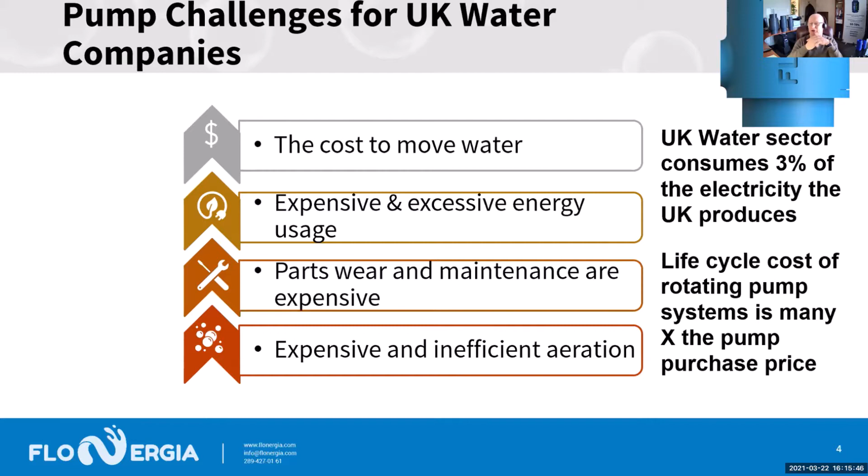The other problems are that pumps are expensive. They wear out. It's difficult to maintain them. And as we know, the life cycle costs of rotating pump systems are many times the purchase price of those pumps, so they're very expensive. The other issue is aeration generally is inefficient and expensive. It costs money, it costs energy to operate.

So how do we solve those problems with our technology? Well, it's quite simple. Our technology uses only the air required for aeration alone to both pump and aerate water. We don't need to do both. This reduced energy profile results in savings of 50 to 70% versus conventional aeration and centrifugal pumping systems combined.

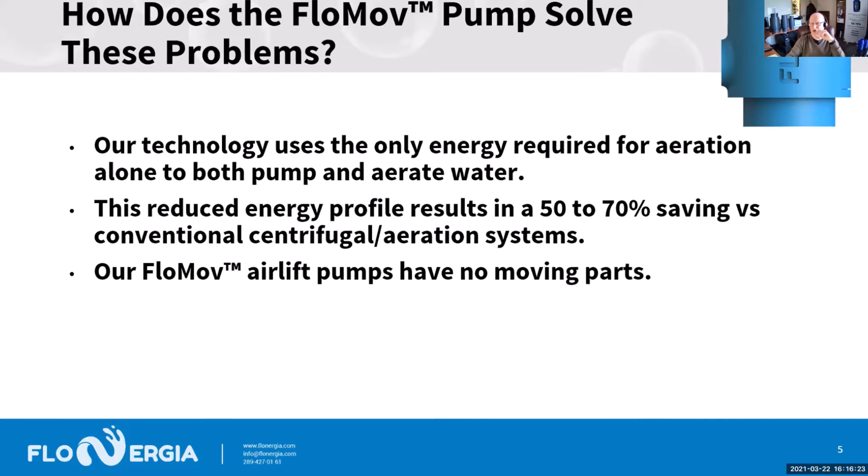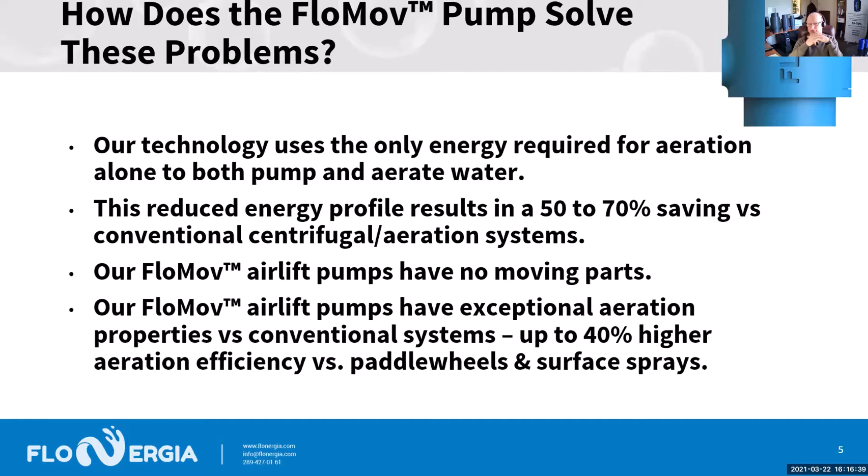Our FloMov pumps have no moving parts. There's nothing inside them. We just use air and the design of the pump itself to move water. Our airlift pump technology has exceptional aeration properties, up to 40% improved aeration efficiency versus paddle wheels and surface sprays. So you're probably wondering, how does our pump work? How does this 100-year-old technology actually function?

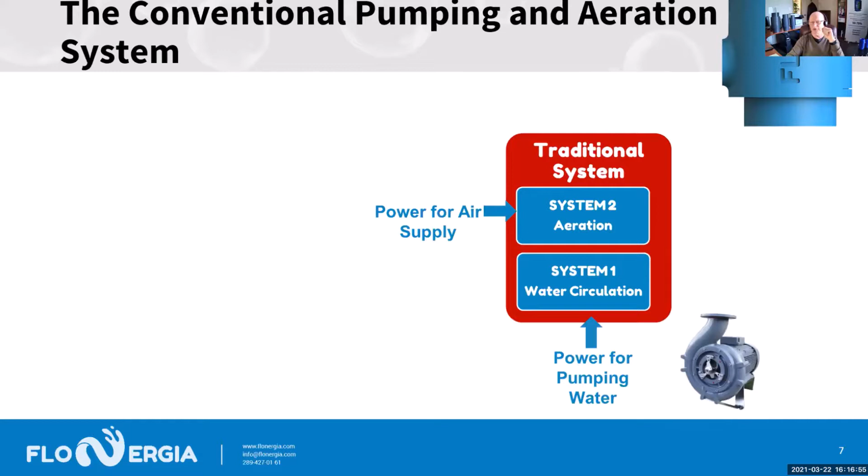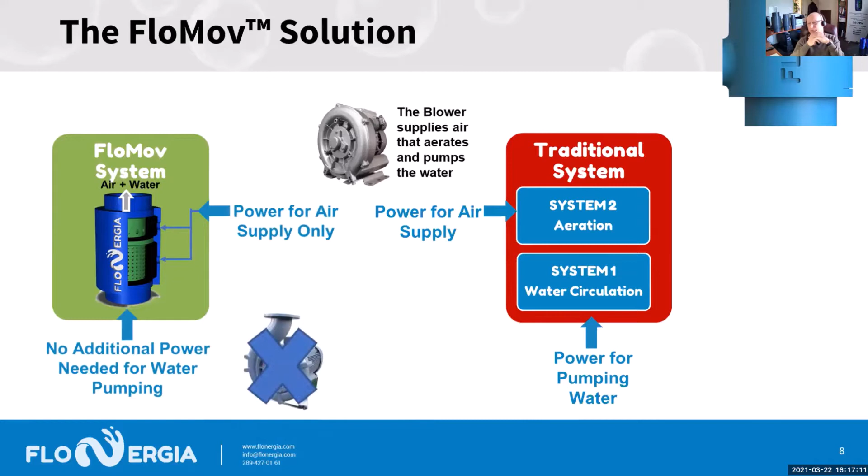Let's talk about a conventional traditional system. In a traditional system, you need power for pumping water and you need power for aeration. For FloNergia, we get all of the power to move and aerate the water from that single blower. We don't need additional pumping. We can move water and aerate it at the same time. So what does that mean? That results in 50 to 70% energy savings and substantially higher aeration efficiency versus conventional methods.

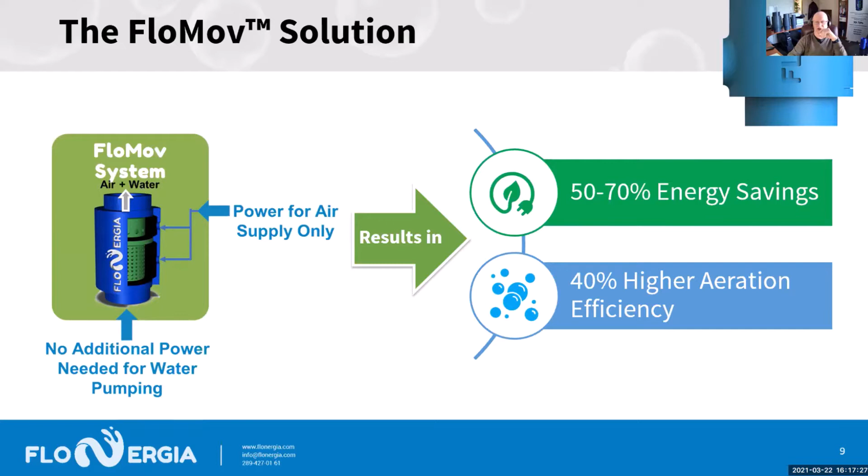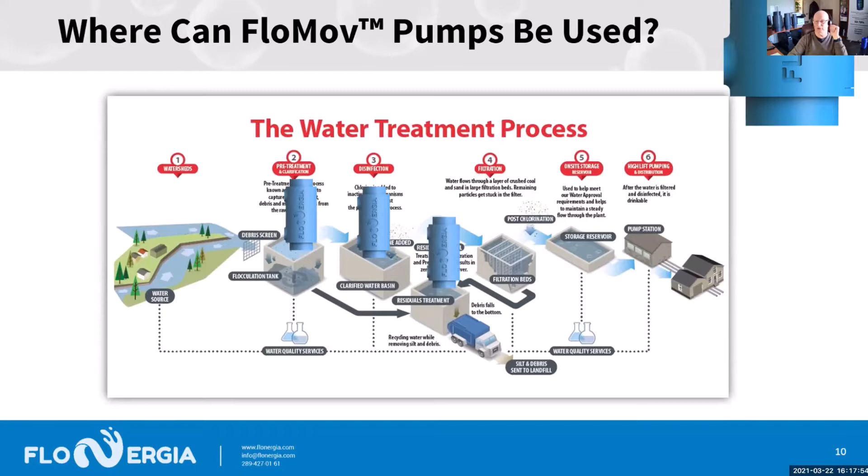So where do we go in a water treatment process? This is a standard graphic I use of the Canadian water treatment process of a typical water plant. FloNergia can be used in the pre-treatment and clarification system. We can be used in disinfection. We can be used in transfer of materials from one location to another. So let's talk about that in greater detail.

So where would you use our pump in a pre-treatment section? We can improve flocculation by aiding aeration. As we talked about, our aeration costs are substantially better than conventional systems, and we get pumping at the same time. We can help with chlorine or whatever your disinfectant injection is, because our technology can use intermittent injection as part of the airstream that drives the pump.

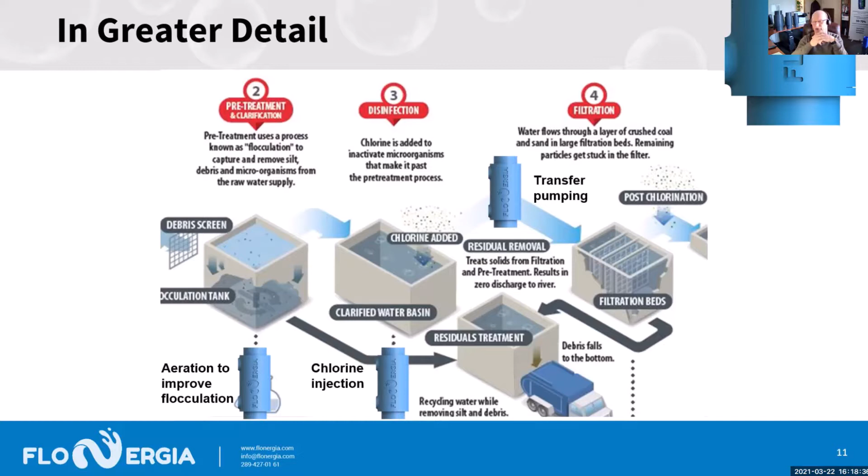Additionally, we can be used in transfer pumping applications, moving water from one location to another. Another unique and very interesting part of our technology is that we can use it to pump and transfer sludge from one location to another.

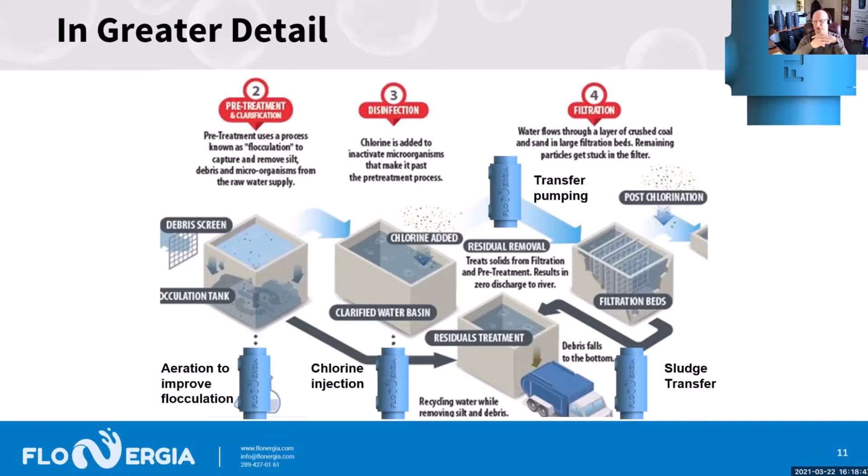A couple more benefits I wanted to spend a bit of time on. We can easily move heavy fluids and solid waste, and we've done that in various wastewater applications around the world. We have no moving parts. It can't be clogged. Our pumps are fabricated from food-grade plastic. There's nothing to corrode. There are no metal materials inside the pumps.

Our pumps also facilitate carbon dioxide removal, which is a great feature for what we do in the aquaculture and agriculture marketplace, but it's also an interesting feature in other applications. Our pumps also disrupt thermal stratification, which in some applications is important, in other applications is less important. It depends on settling and temperature variations from surface to the bottom of a tank.

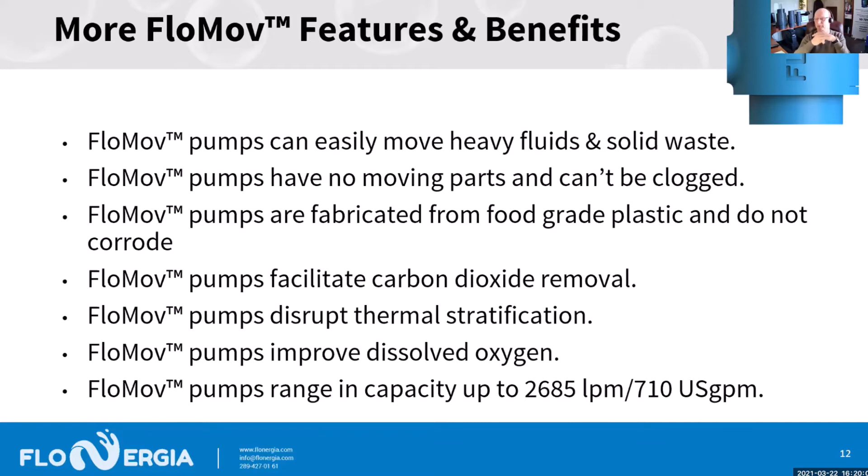We also improve DO substantially, and I have terrific numbers around that. And our maximum size in terms of pumping is 710 US gallons per minute. Now you may say, oh, I have a requirement where I need thousands of gallons per minute. Well, we just group our pumps together to get the same volume output.